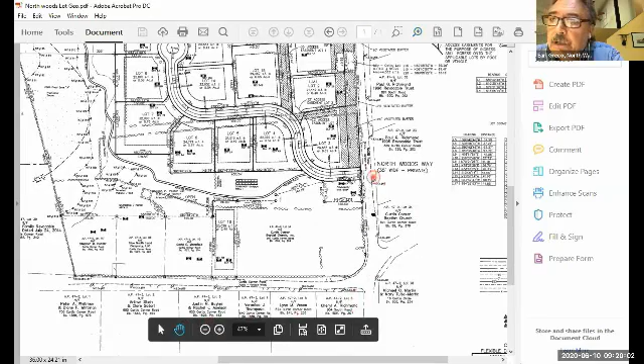Jay, we moved the road 20 feet to the south, and we have flexibility with that. One thing that happened when we changed the road location from the Henry Case Way side to the other side of the cemetery, it negatively impacted us on volume for lot 3, because if we were to maintain it, that's why we were asking for relief on the buffer on South Road - it just squashes lot 3 considerably. We were able to move it over 10 feet, but topographically we have such a variance between the first curve and the point where it meets the cow path that we felt like we wanted to flatten that out and move it. So we came up with moving it 20 feet towards the intersection.

It made that lot, which was previously lot 15, a little bit smaller, but it created the bus stop there. We don't have a problem if you would like us to move it from that boundary a little more. We're just playing with feet there, but it's all connected to that.

And then as you take the road down, we hugged in creating the 50-foot right of way, we came closer to the wall. In developing this property, one of our main concerns was to try to keep some of the historic features of this property in concert with the writing of the flex plan.

So we have historic cemeteries that are on open space, and we tried to put roads where there are existing stone walls. After the second curve where it flattens out, we're following that cow path, and we hope to keep that stone wall that's there. You'll see that's on the frontage of lots 4, 5, and 6.

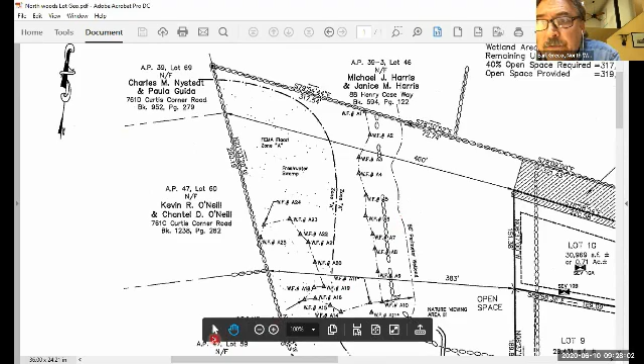460 feet away. I can't see us planting a row of arborvitae 460 feet away, after a forest and forested wetlands, having any significance on a house lot where the property line—not even the house itself—is 400 feet away. If you factor in where his house actually is, it's probably 500 feet away. So to me, that's an issue that could be cleared up with a site visit.

I've also contacted the attorney representing Henry Case Way and said we welcome a site visit, whether at our meeting or whatever works. We'll go walk this property, because we have people weighing in. We've spent 3 years walking every bit of this property, and we welcome anyone who'd like to come for a site visit and see how thoughtful we've been to these neighbors.

I know they've hired attorneys, but when you look at a 21-acre parcel with only 3 acres of wetlands, and you're proposing 14 lots, that's not an aggressive development. Even the fact that we chose to do this with Flex shows we're trying to respect the historic value of this property—the cemeteries, and areas that were farmland or grazing land with stone walls. It was designed around those features, as the Flex plan dictates.

For the relief we're asking on South Road, we hired a landscape architect who came up with infill plantings there. Any clearing we're recommending is to remove invasive species so that what's there will be healthier.

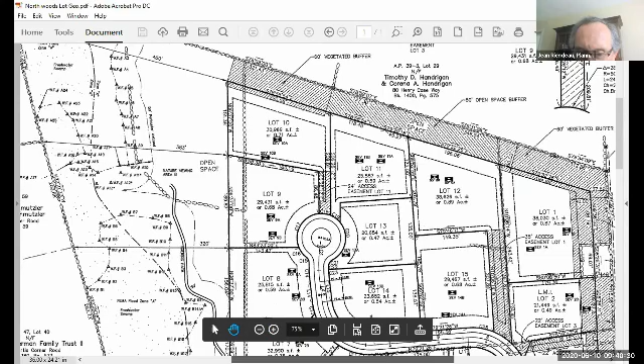I'm good there. I'm just saying, just to the left of that common drive where Jay's cursor is right now. Can you blow this up right there? Is that access? No, I don't think so, it's a setback, I believe.

Okay, so it is a setback. So that's what I'm saying, the access does not continue along the wall. You have roadway access, which allows pedestrians to walk, but it stops at the southern part of lot 12. It's access for lot 1, but it doesn't continue up into the buffer.

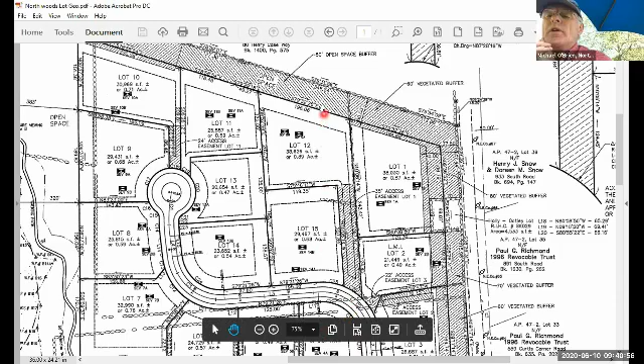May I ask a question, Michael O'Brien here. Would it be, to your way of thinking, acceptable to the board to extend, say, a 10 or 12-foot path that gets you to the open space and allows the residents to use that as access into the northern buffer? I would say yes to that.

And I would also say, if you took that same theory along that wall to lot 5 and 6, where you did have access into the Potter Cemetery, do that there too. I think you're pretty much covered on every lot, giving the community of all lots access, multiple points of entry.

Yeah, that's a strong possibility between 5 and 6, Michael O'Brien. If we were to make that opening to the west of that stone wall, then we could move lot 6 a little over, which would make lot 7 smaller, and create a path right there that would bring them right down to the open space. We could do a 10-foot walking path there, John. I like that, Earl. That might resolve that issue, and we could keep that stone wall there.

We really want to keep these stone walls. Yeah, and I appreciate that. Again, I'm looking at and listening to the comments made from the previous evening from planning board members, and access was a big issue.

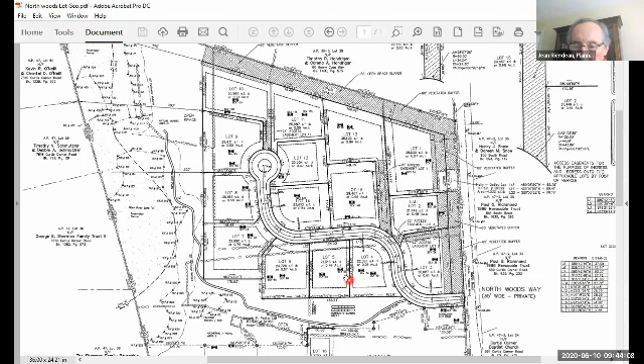Okay, so I understand what you're saying about 5, 6, but you lost me on, so you were saying not to do between lot 1 and 12, not to provide that. Right, access, not to provide that, but maintain at the end of the cul-de-sac, so you've got an access point heading north, and a new access point heading south to the walking path. I'm saying that everyone, when you read it, it says that the majority of houses have access to that.

I understand. If we were to put the walking path between 5 and 6, that gives the center lots 13, 14, and 15 right there access. All they'd have to do is cross the street. They'd have an opening right across the street from them to enter into the largest part of the open space. And then all the other lots abut it, so rather than create two trails there that would probably have to be maintained.

Yeah, I understand. I'm fine with that, Mr. Greco. Yeah, so let's look at...

Oddly enough, one of our first plans had that in there, but as we address some of the other changes, it squashes things down. And topographically, now I know you say well you could make these lots smaller, but I want you to, if we could look at the other plan that shows the topography, I'd like to explain something that would kind of reinforce why we're making some of these lots bigger also. If we could get that other plan up.

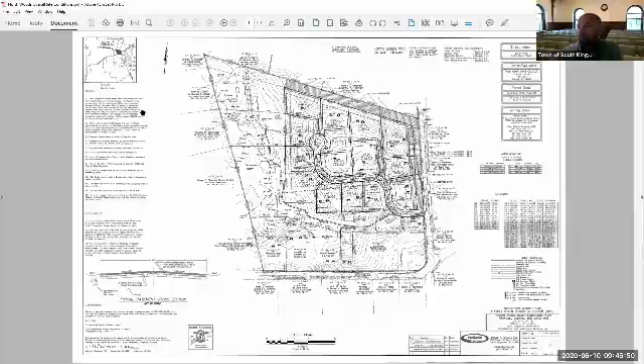Let's look at lot 7. If you could zoom into that... Now those are all 1-foot contours that you're looking at there. So when you look at lot 7, you can say that's a 32,000 square foot lot. It's probably one of the biggest lots in there, but when you look at the contours, keep in mind, it drops off significantly.

Now the town of South Kingstown, not the state, but the town of South Kingstown mandates a 150-foot setback from the wetlands perimeter for a septic system. So we have to locate those up on that hill there. That's what's happening, but you can't build there, you wouldn't want to build there, it's not a desirable site to build. You'd have your septic system, so the lot needs to be that size just to accommodate a house and the septic system distance. So we're not only dealing with a topography that significantly drops off, we're also dealing with the 150-foot setback that only South Kingstown requires for a septic system from that perimeter wetlands.

If the town wants to give us relief from the 150-foot setback, and our soils are good, then we could probably make that lot smaller and make an open space there with just an access road going to it. Perfectly willing to do it, but we can't. That's another requirement and obstacle we deal with in designing these things. So there's more than lot size to consider when doing this. We like the flex plan because we like the 40% open space, and we meet it.

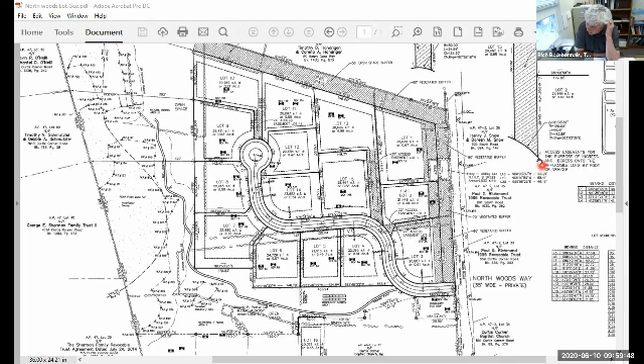Rich, I did. And I also want to point out one other thing, Earl — you brought up that I said it was okay to have a 40-foot right of way, but that's not really my decision. All I said about that, and I want to be real clear, is that we would not entertain anything less than a 40-foot right of way, because that's sort of the minimum standard in our regulations.

So what you had originally was 35 feet. We wanted to see it go to 40 feet on the right of way, and the 20-foot — we talked about the 20-foot pavement — but it is not specifically our decision per se. It's more of a recommendation from our department, from DPS and from engineering.

I understand that. And I think you and I have had the discussion about paved roads at 20 feet. I thought it was you who brought up the point that sometimes a smaller road actually is a safer road because people aren't traveling as fast. I thought maybe I'm wrong, but I thought you had mentioned that also.

No, my only discussion on that is that our standard is when you have the 40-foot right of way, you can go to 22 feet. But that 22 feet includes a berm. In this case, you're not using a berm. I understand the drainage standards have changed over time, so we really promote the swales and things like that for water quality treatment, rather than doing point source treatment. We try to do it as sheet flow and then treatment along the road. Those are all beneficial, I think, to the environment.

So the 20 feet would still be the travel portion. Right, so if you had superfluous... right, so I got you. As far as the drainage, in a sense you're still sort of meeting the standard. It's my opinion.

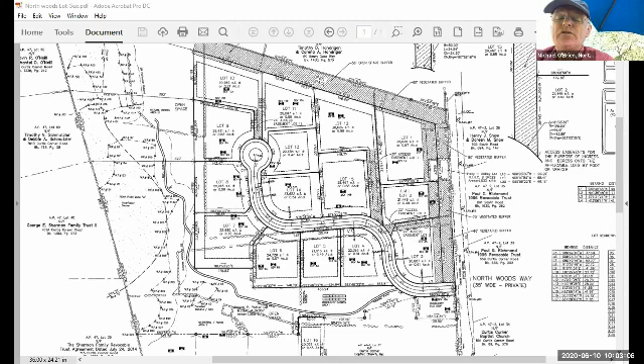I did bring that issue up with the engineer after you and I spoke. I would also interject that the lots abutting the wetland at 6, 7, 8, and 9, and their slope, encourage on-site drainage improvements for each of those lots.

I think Rich is talking about the road drainage separate from infiltration on individual lots. Am I correct with that, Rich? DEM may still look to see what you're doing for structures in order to manage that water, that drainage as well. I'm not sure what DEM is going to say about it, but it's the whole thing—you've got to look at the whole thing, and whether you're able to manage.

We are, and we have flexibility with lot size now. We need to move forward, and with this plan we have some flexibility with lot size if we do have to accommodate certain drainage, and we definitely have flexibility with buffers going to the west. I mean, we're 385 feet to 320 feet, 460 feet away. These are enormous distances considering what we're proposing here.

We can do a sightline analysis if necessary. I hate that we've spent a lot of money on this already, but if we needed to do a sightline analysis to show the distance between the O'Neill's property and that it's a significant buffer—I don't see where we're not saying we're building 10 feet from a property line. We're 400 feet away.

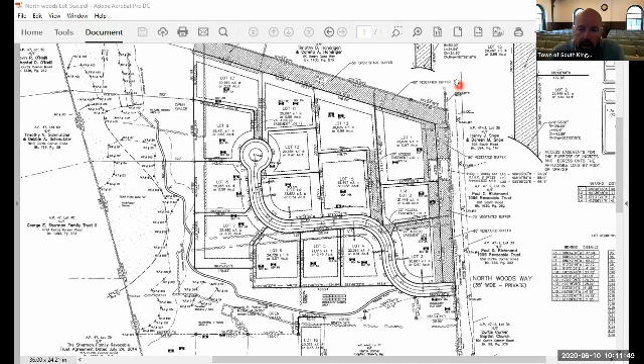Another point I want to make, and I'm saying this because of what I heard from the board at the last meeting — you have an FDRP that allows you to reduce the lot sizes significantly in favor of open space and buffering and all of that.

I understood the concerns about the sizes of the lots and that there was, as John had said earlier, more in line with a conventional subdivision. You're meeting the open space buffer requirement of 50 feet along the northern property line.

And you are not meeting the 100-foot buffer requirement along the South Road property boundary. When you look at those two pieces together, you're asking for a waiver of the buffer requirements for the 100 feet, but yet you still have the ability to reduce those lot sizes and otherwise conform. To me, I think that's important, because the 100-foot buffer requirement, particularly with the public input, is extremely important.

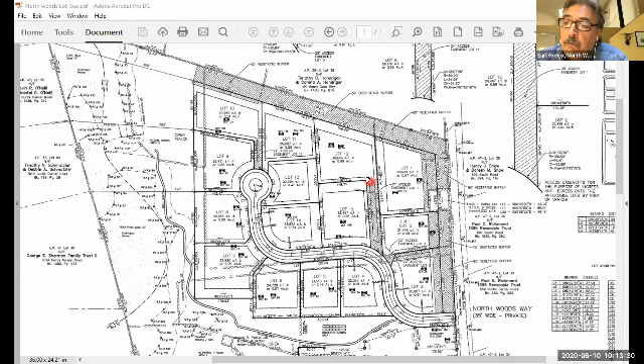And you do have the ability of reducing it, although I understand it's not your preferred design, and you're trying to get to a project that works. But that is a pivot point, I think, because you could meet that buffer, but you're choosing not to. I agree with you, and I thank you for pointing that out, because I realize what you're doing is interpreting from all angles where this could go, and I appreciate that. I think that was the takeaway from it. So it's kind of like the elephant in the room, and I just want to make sure there's no surprises.

If that is in fact the elephant, I agree with you, because it's hard. When you look at a meeting and you have a neighbor that's 400 feet away, and they're talking about buffers and complaining and hiring an attorney, and they hire Landry to represent them, and they're 460 feet away or something. And you say, well, you could move this entire project even closer to them. The problem is we have the 150-foot setback for the septic systems that the town requires.

Let me ask you a question. Is there any waiver that could be given on that 150-foot setback from the permanent wetlands for a septic system? It's a special use permit. Wayne can speak to it better, but the property would require a special use permit for the installation of an OWTS within 150 feet. This is Amy Goins.

The zoning ordinance doesn't authorize a special use permit to be granted in conjunction with a dimensional variance. Okay, so Amy, I thought that was the case. So what would the dimensional variance be? Reduction of the 150-foot setback. So in other words, they don't have the ability to give that waiver. Is that what you're saying, Amy? Yes.

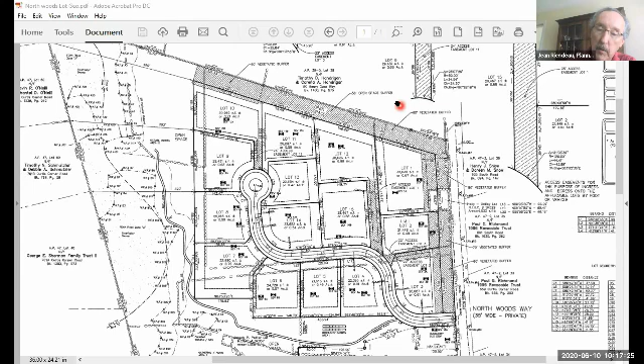And even though you have heard and you are bringing down, in the case of lot 1, you're going to 80 feet. In the case of lot 2, it's now at 70, or proposed at 70. In the case of lot 3, it's proposed at 60. So you've increased it slightly. But personally, I'm okay with that. However, that's just me. I can't speak for the balance of the board who have their opinions on this as well. So I think Jay articulated that concern very well.

Yeah, it's just a comment to the Grecos and to Mr. O'Brien, just be aware of that. That's all. John, I'd like -- excuse me, before you, Earl, go any further, I just want to close the loop though on one other comment.

We were talking about access throughout the development, and you're right, originally Mr. O'Brien commented that originally we had a path going up through lot 1, 12, 11, 10 to access the land, and the neighbors complained, or the attorney on behalf of one of the neighbors, I think it was Mr. Dougherty, complained and took umbrage with that.

He was commenting about the conflict between open space and the walking trail as an example, which I disagree with him. Maybe the buffer, yes, but not so much the open space. It's clearly delineated here.

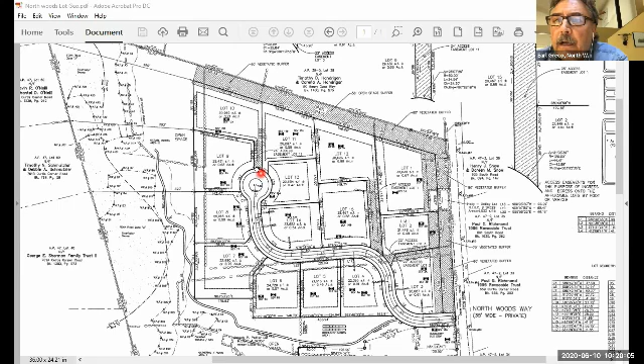Okay, I wanted to- John, go ahead. Earl, let me interject here, just a moment. Regarding the buffers on South Road...

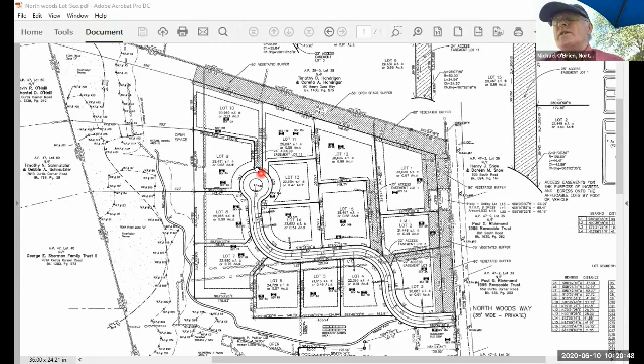We thought that in combination with the elevation of the road and how that interacts with the property, and also the mature stand of trees that covers at least 60%, I'd say 70%, of the immediate adjacent land to South Road, and in concert with infill plantings specifically irregular in terms of where they're placed in depth, which creates more of a natural screening, we thought the board would at least consider giving us relief on those setbacks, such that we could further enhance with the house locations the degree of separation between each other and from South Road.

Understand. Personally, John, I'm fine with that. The other thing, just to address that, I agree with Jay when he said let's address the elephant in the room, and I think he's correct.

That was the reason for the 60-foot buffer on lot 1 on the north wall, which I think should stay. We can reduce that lot size so it's not an easement and create that line, because really where the buffer is most effective is driving up South Road and looking through the open field, and you have that 250-foot buffer we're creating on this plan that's 60 feet deep. It's dense, almost looks intentionally planted, staggered rows of larch trees. Keeping that there and increasing the buffer beyond what's required as a minimum on that north wall, and then we're asking to reduce it to 80 feet. It kind of ensconces that lot and creates a visual buffer as you're driving up South Road.

That was a comment brought up by Steve at the planning board meeting. He said when you drive up, you're seeing that lot 1 over there. So we increased that buffer there, and we're asking to reduce it on South Road, which, as Michael says, topographically at that point near the cemetery, the land is already 6 feet above the road. I think we have elevations that show when the landscape architect did the analysis. So we're already 6 feet above the road there, so when you're driving in front of that on South Road, you're looking essentially at a retaining wall on those first 2 lots.

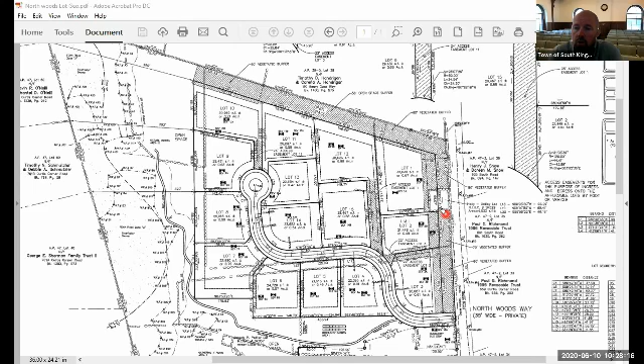Certainly something to consider. There's one other thing I wanted to bring up that we hadn't touched on yet. In your open space management plan, you mentioned a garden shed, and also the bus stop. I think it's important to show those structures because they are going to be located in the open space, and the planning board is going to want to know generally how large, and where they're going to go.

Yeah, in fact it's a good point. I was reading that - I've read the FDRP over again the other night, and I've read it like 3 times since our last meeting, and I did see where they said any structures you're going to propose in open space should be explained. I agree with you, it's just we did not have a lot of time between that meeting and this meeting. We pushed our engineers and surveyors to the maximum to get this to you in time for this meeting, and I appreciate you guys putting this up and taking a look at it. I know it's a rush for everybody.

Mr. Greco, I understand, I'm just putting that out there that you should absolutely have it. It's not a criticism, it's going in our notes right now. Okay.

Jay, regarding the abutters to the north and to the west who've hired counsel, would it be appropriate—not for us, because we've reached out to the abutters about a site visit—but would it be more appropriate for the planning board or the planning department to extend an invitation to those abutters to visit the site, particularly at Henry Case Way and at the Genesee Way property?

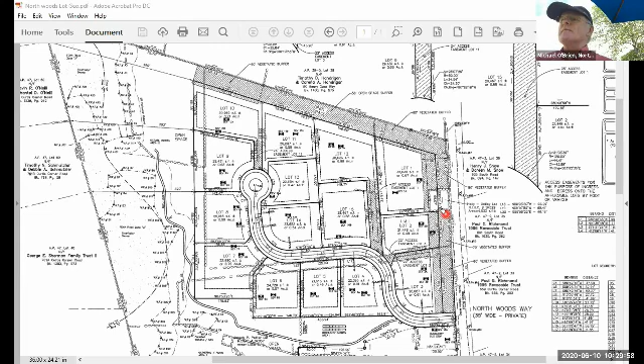Yeah, and we need to do a bit of mowing there, and that's going to be happening soon. But we can make it seamless, where we're not dragging you through the woods, but we could give you an idea of the varying topographies and the varying access points for the open space, et cetera.

Understood. I will go out and say that the staff won't extend that invitation, as it's not something that we typically do on every application. I think the extent of effort is what you as the applicant want to put into it as far as inviting.

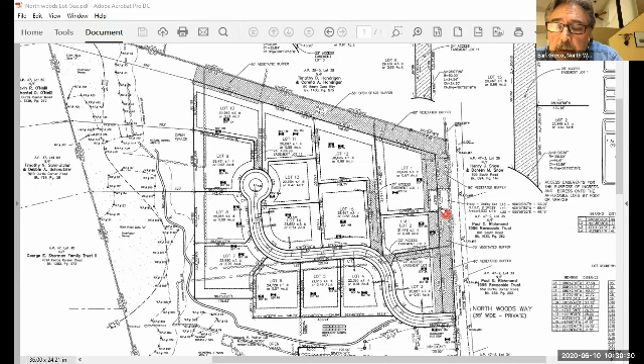Well, we did, Michael. I sent an email to Henry Case Way, to their attorney, and I invited him. I said we're open to a meeting this week, I said we're modifying a plan, please get back to me.

I've heard nothing. So I would— Did you also extend to Genesee Way? No, I didn't extend to Genesee Way. In my mind, I will do that, though. I will do that.

But Mr. Greco, let's—that's a discussion for you guys. You guys have had a lot on your plate today, I realize that. Is there any other members of the TRC that have issues that haven't been discussed or touched on?

Yeah, Jay, I've been kind of quiet, so I just need confirmation. What is being proposed for the width of the right of way? Because I'm looking at the plan, it says 35, 40 feet.

40, okay, well we've increased it to 40 feet. All right, well the plan says 35. Just to let you know, the top of drawing 3—so that needs to be corrected.

Oh, if you look at the entrance there, let's go down to the entrance. Yeah, I'm just looking at the plan set. It said Northwoods Way, 35 feet wide private. Oh yeah, that's on sheet 3. I got you. So 35 feet of right-of-way width, and the paved width is what?

20—no, 40 feet of right-of-way width, John. 40, it's 40 feet. Okay, 40 feet. Yeah, it's a typo, it looks to me like sort of a hanging chad. Yeah, he probably—from the changes.

So the drawing as shown—and of course I can't measure it online—it's a 40-foot wide right-of-way. It's dimensioned at the beginning of the road, John, you'll see 40 feet right there where Jay is pointing out now. It shows 40 feet. We have increased it to 40 feet.

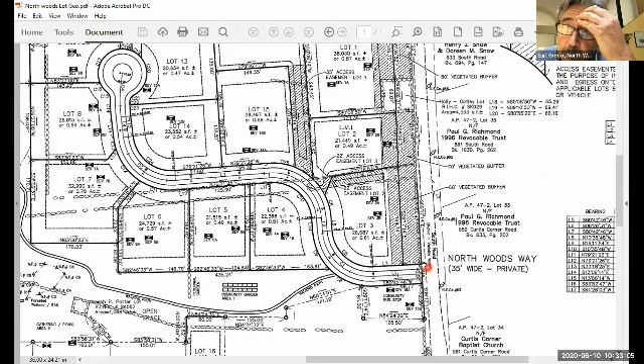Okay, but I just want to make sure that you're showing water, you're staying with potable water to the end of the project—you won't be back at a later time asking for wells. That's correct. Yeah, I mean, who knows what changes in the world, but that is 99.9% of our intention to do that.

Okay, that's all I have. Okay, thank you, Kayla. John, if I may. Go ahead, Kayla.

Okay, so one thing I wanted to talk about is we had Amy Goins join this technical review committee meeting to talk about the waiver you guys are requesting for the road width. If you remember back at the planning board, there was some discussion about what exactly we were asking for a waiver from and how that should be pursued. We have Amy for a limited amount of time this morning, so I want to make sure we hear from her on that.

And then I want to make one other little note. It relates to the location of the stormwater. Right now at conceptual master plan, you guys would be well served to put on the open space where you see yourself putting a stormwater feature if necessary. Good suggestion, because you don't want to be coming in at preliminary plan knowing it's necessary to make the site work, and have the planning board not considered it, and whether or not it would be allowed to be part of the open space the area would be pulled out. You want to put that conceptual location in now, so that you're not being told later you're making a conceptual level change to your drainage down the road. Excellent suggestion. The other thing, a small comment on that,

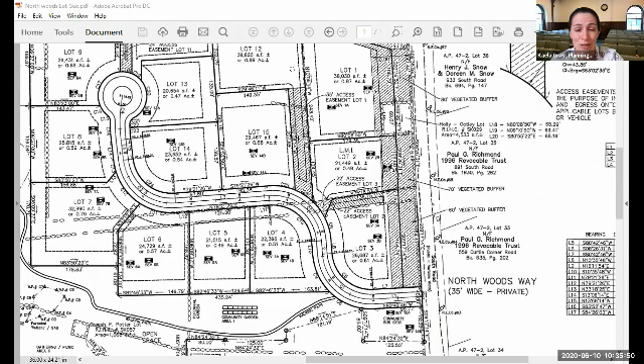we keep talking about how the drainage is proposed within the right of way. And when I was looking at the plan yesterday for a little while, it's not, right? The drainage is proposed on private lots. It's within the setback lines for them, but it's the private lots that actually seem to be on the site plan. The locations sketched out for the conceptual drainage are on those private lots. So we keep talking about them as being in the right of way, but they're actually predominantly on the lots. I want to make sure you're thinking that through, because your developable land lot size needs to subtract out the area of land considered unsuitable for development. Unsuitable for development includes land held under private or public utility easements that have above-ground utility infrastructure. Drainage areas would be considered part of that. If there are drainage swales being built on lot 4, lot 3, on those lots, you just need to make sure you're describing that as it's accurately happening. I keep hearing it described as drainage within the right of way — that is not what you're proposing. So adjust it appropriately so that what you're proposing matches what you discuss there. Yeah.

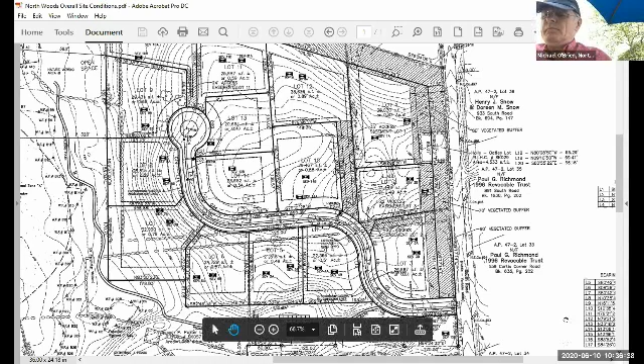And that's sort of what I wanted to add in on drainage. I'll turn it over — I think that was a pretty clear comment, I don't know if there's much discussion needed on it, but then I want to turn it over to Amy on the road.

This is Amy. What is the specific question regarding waivers that are needed, given the revisions to the plans? Yes, so I'm going to give a little summary because I was trying to think about that, and I was trying to do a little bit of work on this yesterday afternoon too. Right now, how do you gentlemen have it summarized in the request for relief? Jay might actually know this answer quicker than anybody, but I believe you guys have classified yourselves as local public, right? The road is classified in one particular way in the public improvement standards. Which way have you classified it, and then asked for relief one way or the other, or have we just not gotten to that level?

It's a private road, but with public water.

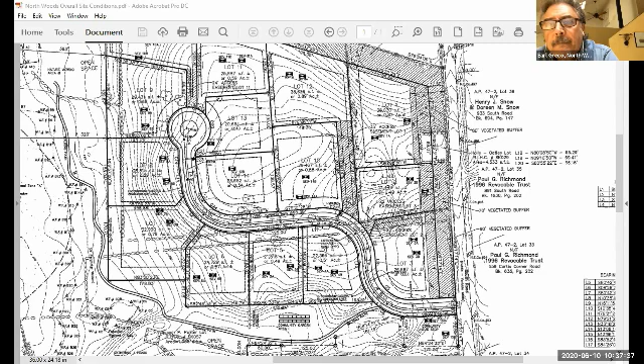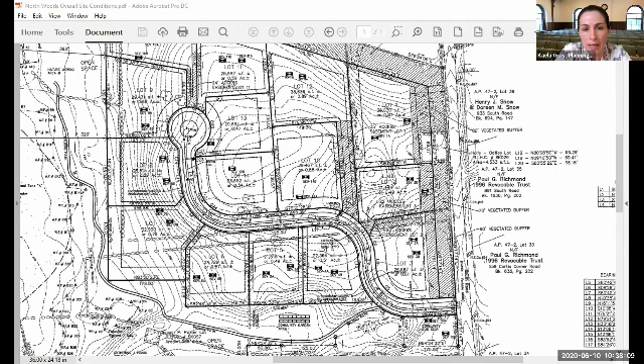Okay, so that's a little bit of a different answer, so I'm going to ask my question differently — I think it might help us get there better. In the public improvement standards of the subdivision regulations, we call a road basically either a local public road or a local private road. Those classifications put forward things like right-of-way width and the number of lots accessed by them, et cetera. So I think what came up at the planning board was that whichever way it's being asked, the road is either going to classify as a local — for the purpose of figuring out what kind of relief we're giving, right? We either look at it and say, if the road is classified as a local public road B, I think is the classification it would fall under for the number of lots, but I'm not looking at my notes right now because of limited screen size.

And then you'd be asking for relief from the right-of-way width, from all the pieces in that, and from it being public, or you're proposing it as private. The relief being requested is about basically exceeding the number of lots proposed.

But Amy, I think what we had talked about at the planning board, and I got a little confused on it, was whether those were definitional, like whether that category of roads was definitional in nature, and how the planning board would process relief on it.

I want to bring one thing to your attention. When I was looking into it yesterday, the FDRP regulations for streets seem to try and give the planning board flexibility on these. Basically there's a section in the FDRP that says streets in an FDRP can be publicly or privately maintained, and that they should meet the street design standards of the regulations when designed to be public, and that private streets shall be adequate for the intended use and vehicular traffic and shall be maintained by an association of unit owners or other means. So it seems to me pretty clear that the intent is to let the planning board give relief to the ownership and the standard of it.

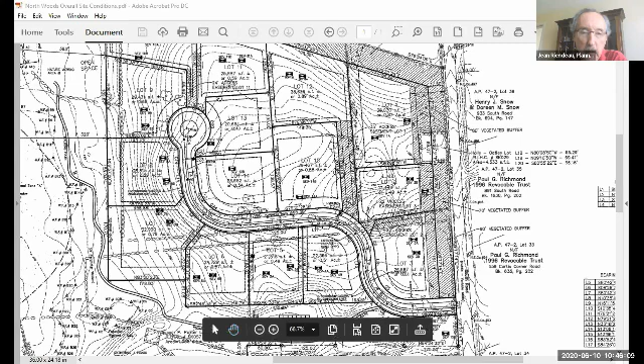I just want to close the loop again on my suggestion of closing the trail loop, and for the developers to consider closing that loop and bringing it to between lots 10 and 9. After that suggestion, I wrote that on our notes, John. And then also you're talking about an access path between 5 and 6, and that's included in our notes also.

So I think we have some good takeaways from this meeting. Obviously we're not there yet, but I hope that you guys realize we're working towards this. Thank you.

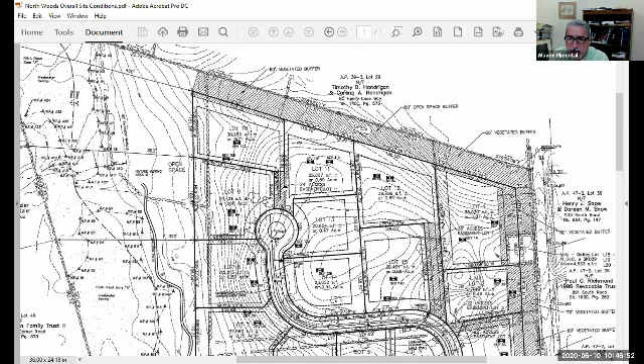Jay, this is Wayne, I got a quick question. The cemetery, I drove by there last week and noticed that the wall is deteriorated. Who's responsible for that? I think the state is, because it's an historical cemetery, right? I don't know. But the wall right on South Road is pretty bad.

I'm not comfortable touching that. The graves are right up against that retaining wall there, so I would not want to be the guy who would just go in there and try to move those blocks. It's something that we would work with someone on possibly, but I think that would require someone from the state to weigh in.

I know it's a Rhode Island historical cemetery, but typically they're owned privately, they're private cemeteries, they just have a designation as a state cemetery. Maybe John Schock can weigh in on ownership of that. I'm just looking at the GIS map, which isn't always correct, but 99% of the time it is. It looks like that is not called out, some cemeteries in town are called out as a separate plat and lot. This one is not, so I'm assuming it's part of this parcel.

Is that correct? Yes, it is part of this parcel, whether there are heirs to people interred there and a maintenance responsibility for that, I don't know. But it's part of this parcel, so to me it's a question for Amy. Are they responsible to maintain that cemetery?

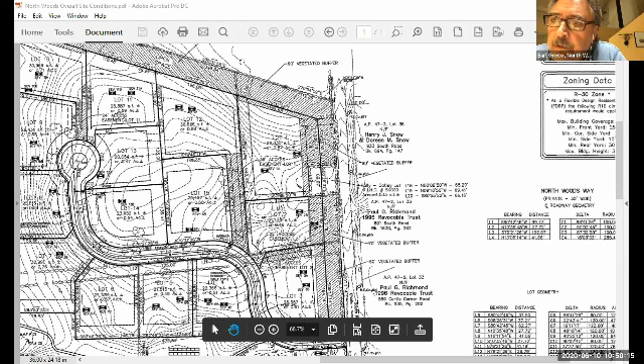Thanks, that's all I have. Thank you, Wayne. Very good. Anybody else? Okay, I think you guys have some ideas and some things to think about going forward, and appreciate your attentiveness to getting the plans revised for this discussion today.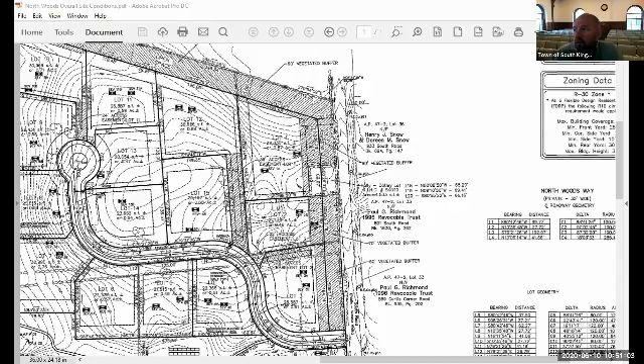Okay, next item on the agenda on the TRC advisory review is conceptual master plan, major land development, zoning map amendment, and comprehensive plan amendment. Shepherd's Run. Proposed major land development application, zoning text and map amendment to rezone from R80 to Route 1 Special Management District, and a comprehensive plan amendment to support the development of a destination resort and winery, including boutique hotel, winery and vineyard, restaurant, indoor and outdoor events, spa and fitness center, and extended stay bungalows on Assessor's Plat 50-4, Lot 12, located at 4780A Tower Hill Road. Morgan Show and Hospitality is the applicant, and the owner is Ocean Pastoral Center Incorporated.

Mr. Schoen, how are you this morning? Good, how are you guys? Very good, very good, good to see you. Good, well thank you for taking the time.

James Callahan is here as well, especially to help out with all the text and zoning and comp plan language changes, because that was definitely a first for me. So we took a stab at that piece, and I can obviously answer any questions on the plan and design that exists there. But I do have your documents digitally, so if there's any that you'd like me to put up on the screen to share, just let me know which ones of the ones that you provided, and I can do so. Great, so obviously we had a work session and listened to all the feedback, and we attempted to refine the plan from there.

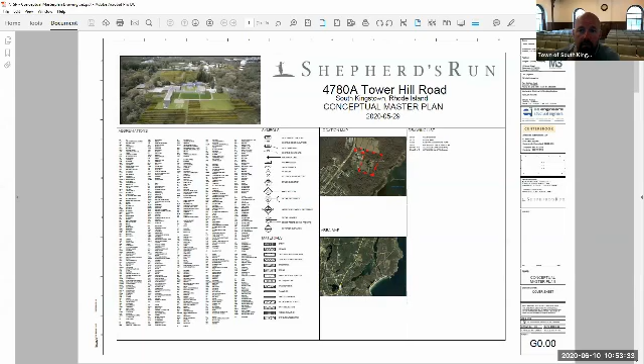So anyways, kind of going through the list here, there's not a tremendous amount of work being proposed, especially actually in phase one. We're really renovating existing buildings and putting in vineyards. And then we attempted to, it's page 4 of that, Jay, as you're going through. I'm just trying to clear up my screen real quick so I know where I'm going. Yep, no worries. What page was it? Page 4.

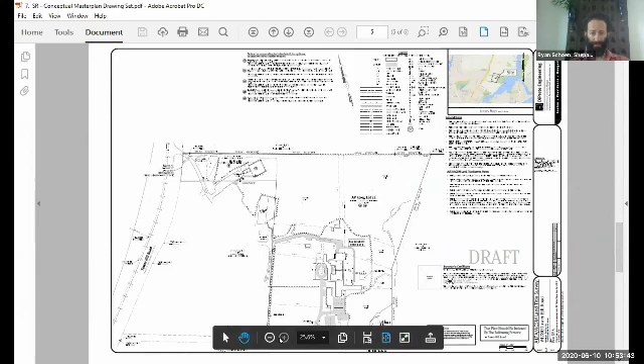Perfect. Oh, one back? Yes, please. There you go. So if we look at the right-hand side of this, we attempted to line out the different phases color-wise. The light pink, purple color is phase 1, which is really just renovations to the existing structures. There is a walkway that extends across right now on the right-hand side of this plan, so I guess that would be the east side. You can see like a little pink, your cursor to the right there, Jay.

Sorry, there's a, let's see where it says hotel units restaurant, you see that? Oh, do I have control now? Here you go, you can see my mouse. Okay, so right, no, here. I think you need to just accept. Oh, I need to accept, let's see how do I accept. You are controlling, King Self. There you go, hey, all right. So right in here, there is an existing walkway that extends across that we are planning to demo. It blocks a lot of the views from the main historic manor house.

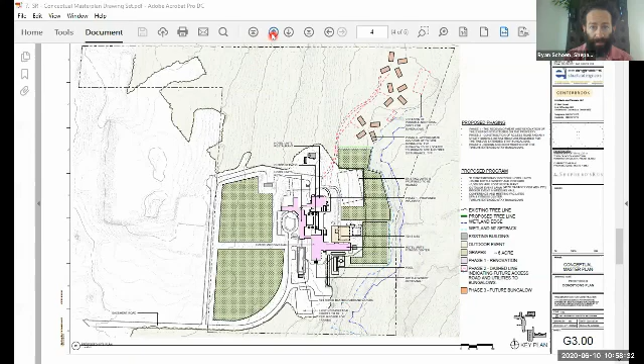So Mr. Schoen, thank you. This is John. And just to your very first comment where you indicated you wanted to demo, and I'm familiar with the property, having toured it previous to you coming into the picture. So the demolition, that's actually the connection between the two existing buildings.

Yep, and let me, since I have control of this screen here, I'll try to highlight that for you. Perfect, there you go, so it's right there. Walkway, right? Yep, exactly, so that walkway, and this is for everybody, I think you just may have, it's 2 level, so there's almost like a subterranean level, and there's a level above grade. So that's a 2-level walkway.

So what I'm hearing from Mr. Schoen is you're going to demo the above grade walkway, retaining the subterranean walkway between the 2 buildings to the left and to the right, correct? Correct. Okay.

It's a great visual, by the way. I was thoroughly impressed. This is what happens when actual architects, I guess, get involved as opposed to me drawing things.

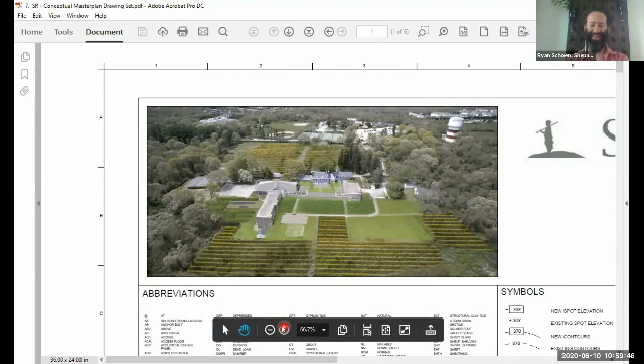Mr. Schoen, have you had any discussions with DEM regarding the existing septic system? We've just submitted for, or we are in the midst of submitting for the predetermination letter with CRMC, but nothing beyond that.

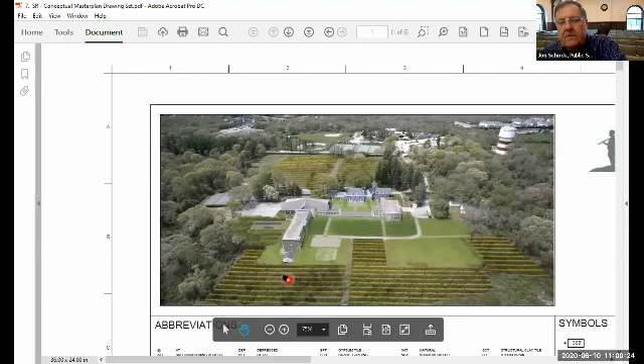Yeah, I mean, very preliminarily, we looked at it and we attempted to cost it out. It obviously, due to the grade changes, it's a hike plus pumping and everything else. And this system was installed in, I want to say 2003, I have to verify that. We do have the plan set from when it was designed.

I mean, okay, really expensive. So again, your consulting engineer is going to have to prepare the sewer feasibility study, which has 9 criteria, one of which is economic feasibility. So you can't hang your head entirely on that one criteria, you have to go through the other criteria. That's in section 19-115 of the town code.

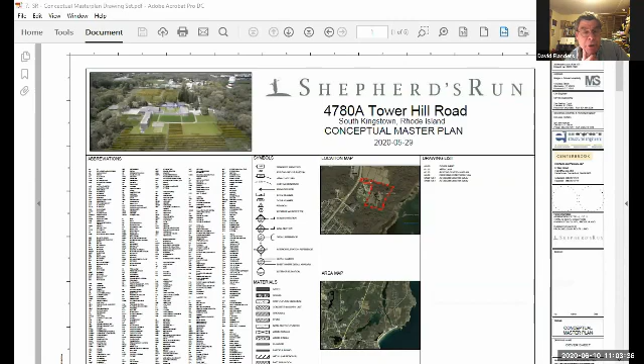Any other concerns? This is David here on Conservation Commission. I'm more concerned about the proposed 12 bungalows. Given the grading that's going right down into the Pettaquamscutt, I would definitely like to see sewers address them rather than having the OWTS. I think it's a very sensitive area, particularly because of the grading down to the water.

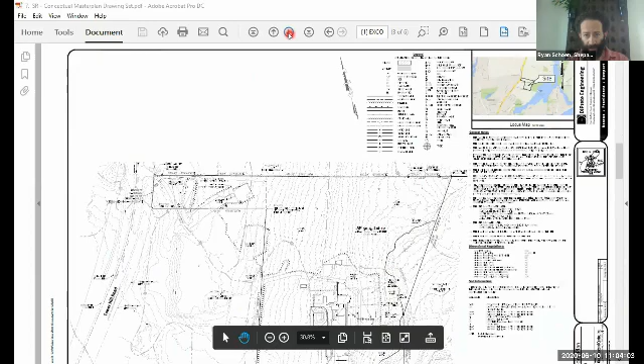One of the things we were trying to say, David, just let me get back to that plan there, is keeping the same grade elevation as the existing, and part of our analysis was to look at what the final capacity is of this OWTS.

The existing system, I believe, is designed for 120 full-time occupants, and our load is considerably less than that. So if we can even utilize this existing system, that would be our first goal, obviously, but we need to do further analysis on that. We are trying to stay up on that higher grade rather than down below.

So, Mr. Schoen, specific to Dave Flanders' comment, can you describe the intended use of these extended stay bungalows a little bit? Yeah, so these are transient guest bungalows. The goal is really for their use during the summer months. Think of them as the summer cottages that people would be at.

They're not designed as residences or full-time houses, anything along those lines. But they are designed to have 2-bedroom type situations rather than in the actual structure down here. These are standard guest rooms.

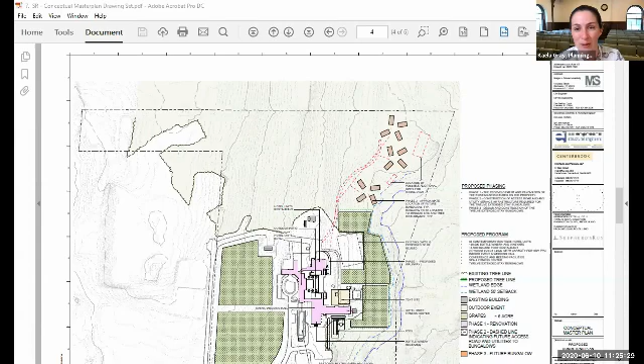I have one other thing if we're going through things. I'm going to applaud the reuse of things on the site. I genuinely think—we talk very often about reuse and redevelopment, and very rarely does it actually come forward in a way that tries to reuse all of the pieces there. This is my segue to talk about your parking on the basketball or tennis court areas. I think the idea of reusing those areas makes a lot of sense, and that's why I'm saying that about the redevelopment and reuse concept.

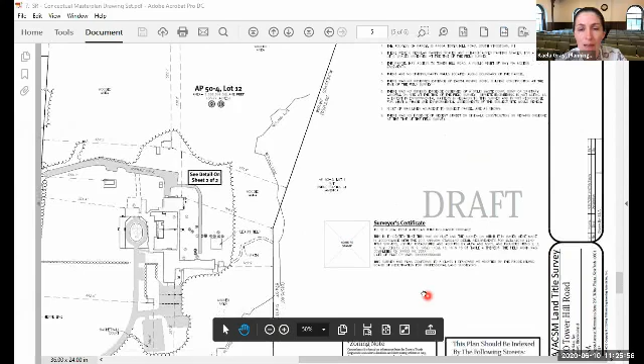A conceptual master plan, something that would be helpful for the planning board relative to your site development plans, is an area calculation on the parking areas you have and how that stacks up to the zoning ordinance requirements for parking on the site. Just to give an idea—you don't need a design of the parking lot right now, but something that shows if there are X number of spaces required, you have sufficient area to provide them, or if you're going to have to expand an area, we're just identifying where that area will be.

Okay, that makes perfect sense. So that would be twofold, right? An area calculation on the parking fields you have depicted, and then a breakdown of what the zoning ordinance will require for parking for the uses. We will note both. Thank you.

Does anybody else, any other TRC members, have any questions or comments?

No, other than just to comment to Mr. Schoen in particular for the activity and work he's performed to date on this. Documentation is detailed and looks good. I think the staff has provided additional quality comments, and that's helpful as this moves forward. Again, I like the project. I think this is a very good adaptive reuse for a property that has been idle for the last 3 to 4 years with really minimal consideration as to what to do with it. I think this particular use and the planned use is ideal. The property is out of sight from Route 1—you can't see it from Route 1, the down gradient of the slope is there—and yet it's a beautiful site with some potential distant views, ocean views as well. So I like what I'm seeing, and I can only encourage the applicant to continue. As chair of the board, I know the board will give this very careful consideration. I think when we did the pre-app, you heard some of those comments—there was just a genuine liking for the proposal. It's just working through the details, which I think can be addressed.

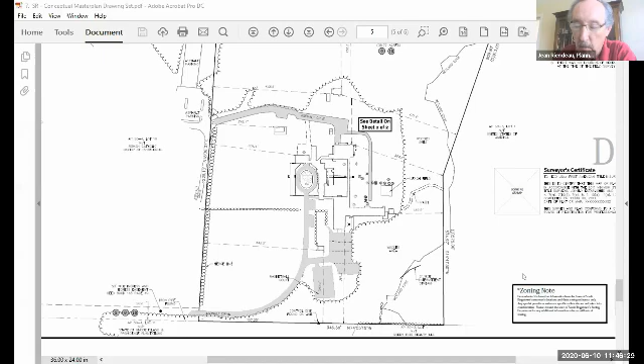You're referring to what was articulated at pre-app. There was that discussion, also discussed with staff, and it seemed to be the best option, being that it's across the street and not contiguous by virtue of Route 1, but in essence it's an easy flip to the property that provides the intended uses proposed by the applicant. That's why the SMD was discussed and is being used, as it's an overlay district, and it governs a lot of issues and uses that the applicant is proposing. Okay, thanks.

Very good. Anybody else have any questions or comments? What's the desire of the TRC at this point? Favorable advisory to move on to the planning board? Any stipulations?

Kayla, based on your experience, any specific considerations for the TRC to consider when making this type of motion? The quick answer is largely no, to be honest. This is a lot like any other conceptual master plan. The comments we talked about today, including outstanding items, can go forward to the planning board with an understanding that these are things that need to be addressed. The merits of our conversation today go into a summary, but they particularly go into a table that gets used directly to frame what the technical review committee thinks the planning board needs to look at when they're doing the review.